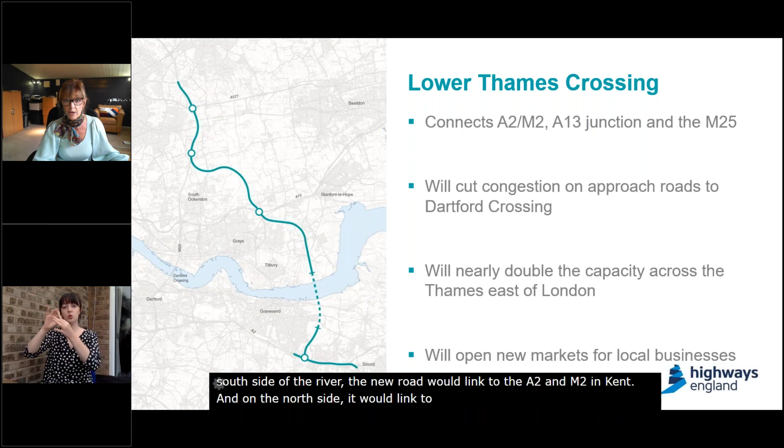So I'm now going to take this opportunity to provide a brief overview of the Lower Thames Crossing project. The Lower Thames Crossing is a proposed new road connecting Kent, Thurrock and Essex through two 2.6-mile tunnels beneath the River Thames. It would almost double road capacity across the river east of London, boosting local, regional and national economies, while offering new connections, better journeys and fewer delays. On the south side of the river, the new road would link to the A2 and M2 in Kent, and on the north side, it would link to the A13 in Thurrock and the M25 in Havering.

We're proposing a number of refinements to the design of the Lower Thames Crossing based on feedback received during previous consultations, and also on engagement with our stakeholders and ongoing design work. We now also have a much better understanding of some of the technical constraints, including new information about existing utilities. The proposed refinements include reduction to the overall size of the development boundary, minor changes to highways design, updated paths for pedestrians, cyclists and horse riders, fewer utilities diversions, more detailed landscaping proposals, and further developed ecological mitigation measures.

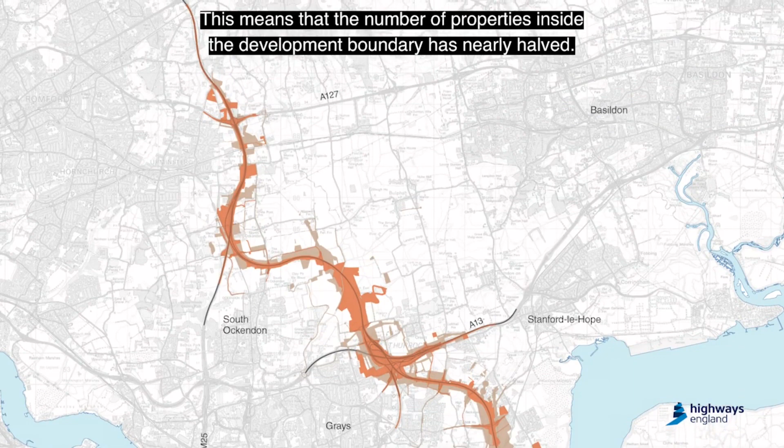Because we've refined the design of utility diversions in areas along the route, our overall development boundary, which is the land we need to construct the scheme, has reduced in size. This means that the number of properties inside the development boundary has nearly halved. You can see more details on this in our consultation documents online and in our virtual exhibition. If your property is in or near the development boundary, we will have written to you directly, but if you've got any questions, please do get in touch.

Around the northern tunnel entrance near Tilbury, we're proposing to install utilities that would provide a power supply to the tunnel boring machine and northern tunnel entrance during and following construction. A new water supply for the tunnel boring machine and construction site area would also be required. This supply would come from the Linford borehole and a local water main.

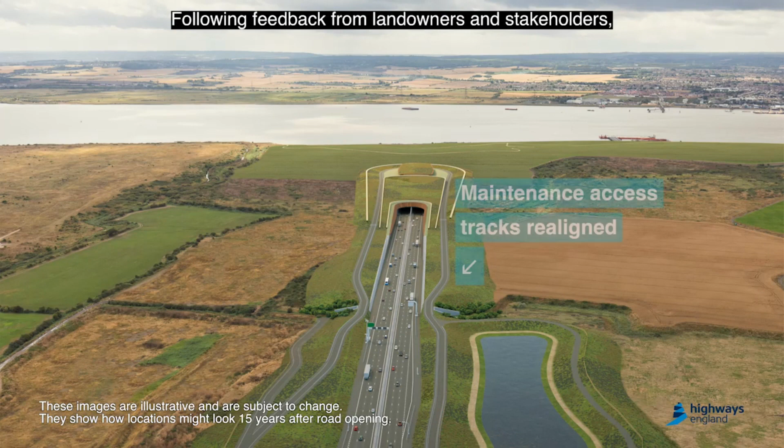We're also proposing earthworks which would create a new landform design around the tunnel entrance and provide wide-ranging views overlooking the Thames estuary. Following feedback from landowners and stakeholders, the maintenance access tracks around the northern tunnel entrance would be moved closer to the Lower Thames crossing. This is to allow for a shorter culvert length, which would minimise the impact on the local ecology and allow wildlife to navigate through the culvert more easily.

Two footpaths in the area would also be slightly realigned, and a new shared path along the south of Muckingford Road would also be progressed. This would allow for better connectivity between Chadwell St Mary and East Tilbury.

Near the A13 junction in Orsett, we're now proposing a new area of land for the relocation of the Travellers site. This would be adjacent to its current location with access off Gammonfields Way. As part of our woodland planting proposals, we've identified two separate areas off Baker Street that we would look to make accessible to the public.

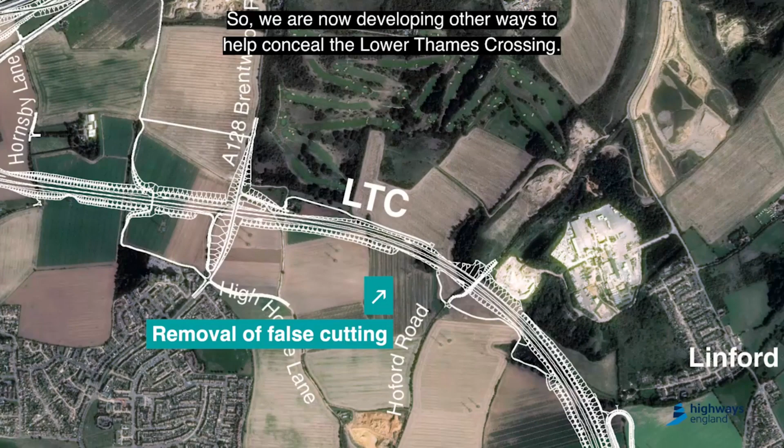Due to the essential realignment of a watercourse, we're proposing to remove a false cutting that we previously proposed in a section of the route between the A128 Brentwood Road and Hoford Road. So we're now developing other ways to help conceal the Lower Thames crossing. Further details on this can be found in our consultation maps and documents online.

As part of our utility proposals, we're planning a new permanent compound at Stanford Road, just to the east of Orsett Cock Roundabout. This would be required for the operation and maintenance of a proposed gas pipeline, which would supply the local community. In the vicinity of the Mardyke, we're proposing permanent access from Green Lane for the national grid. This is so it could maintain overhead electricity transmission cables during the diversion works and afterwards for the operation of the network.

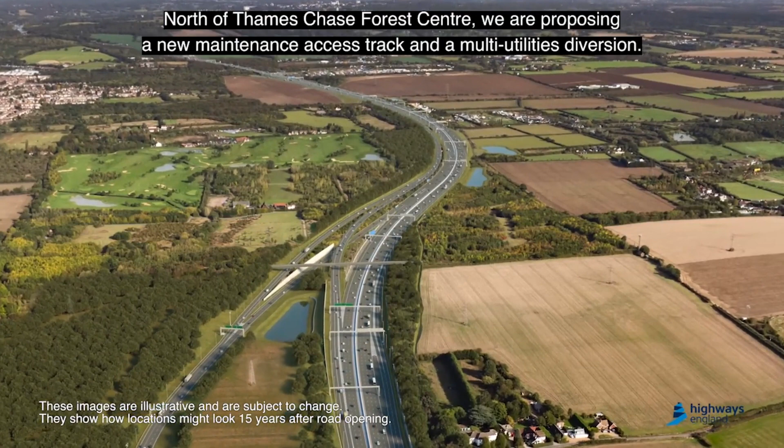North of Thames Chase Forest Centre, we're proposing a new maintenance access track and a multi-utilities diversion. We've located these within the same area to limit the reduction in woodland compensation that would be required to accommodate these changes. Around junction 29 of the M25 within the vicinity of the B186 North Road, some above and below ground multi-utilities would need to be diverted to facilitate the proposed route. Full details about these utilities proposals can be found in consultation maps and documents online.

We've been exploring solutions to maintain connectivity over the A127 and propose a new footbridge which would link the existing routes.

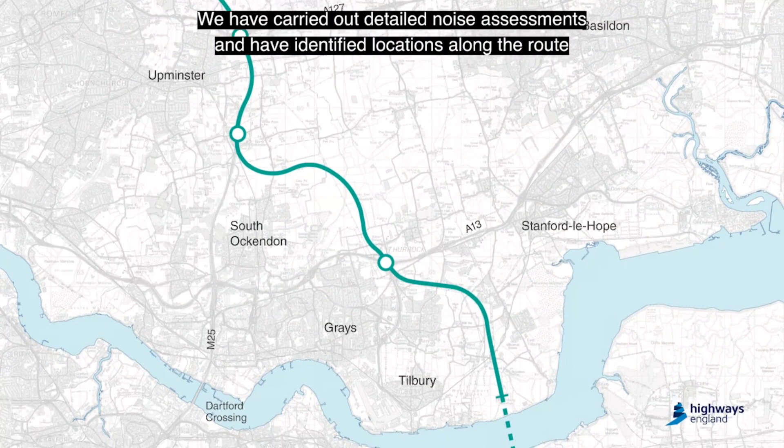We've carried out detailed noise assessments and identified locations along the route where noise barriers could be used to reduce the sound of traffic for local communities. Further details on these proposed locations can be found in our consultation documents and maps online, and in our virtual exhibition.

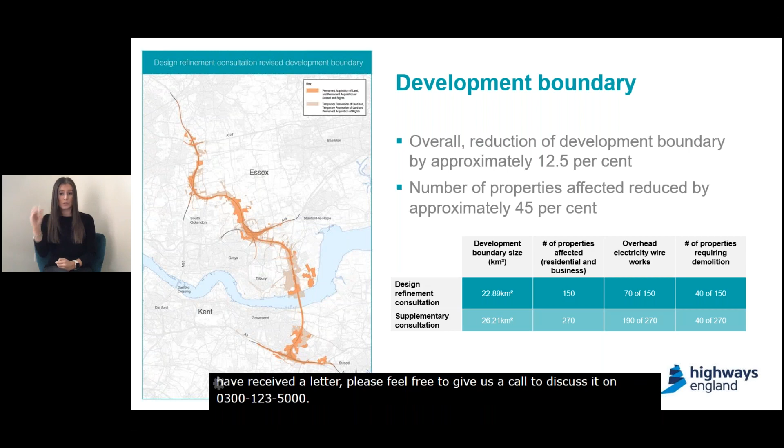If your property is affected by the scheme, you should have been written to already. If you have received a letter, please feel free to give us a call to discuss it on 0300 123 5000. That's 0300 123 5000.

Okay, so on to environmental impacts now. Firstly, ancient woodlands. Following feedback from our supplementary consultation, we've been able to refine the land required for utility diversions shown at supplementary consultation. In doing so, we've been able to reduce the impacts to various wooded areas.

Regarding green bridges, we've improved our landscaping proposals, resulting in better opportunity for ecological connectivity. This means we will now have consolidated green space on the bridges, featuring vegetation like hedgerows, shrubs, trees, and grassland. This will make it more attractive for wildlife to use as a crossing point over any given road. And finally, noise barriers.

To help mitigate noise, we've introduced noise barriers in areas where higher noise levels and disturbance is anticipated. These barriers vary in length and height along the route. To learn more about a specific noise barrier, please refer to the Guide to Design Refinement consultation.

Now on to landscaping. As we've progressed the design of the Lower Thames Crossing, we've also developed more detailed landscaping proposals to mitigate visual impacts of the project's above ground infrastructure.

Since supplementary consultation, we've added more detail on the specific type of ecological mitigation proposed across the route, such as more grassland, woodland, and further refinements around watercourses. We've also provided an update on new landforms and new viewpoints.

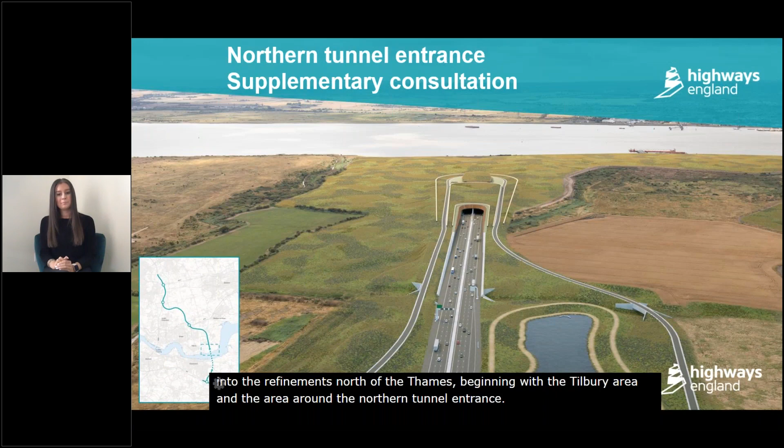So on the screen right now, I can't see it myself, but I hope you can. There should be an image showing the Northern Tunnel entrance near Tilbury as we presented it at the supplementary consultation. Next we'll switch between this and an image showing our proposals for this design refinement consultation so that hopefully you can see the difference.

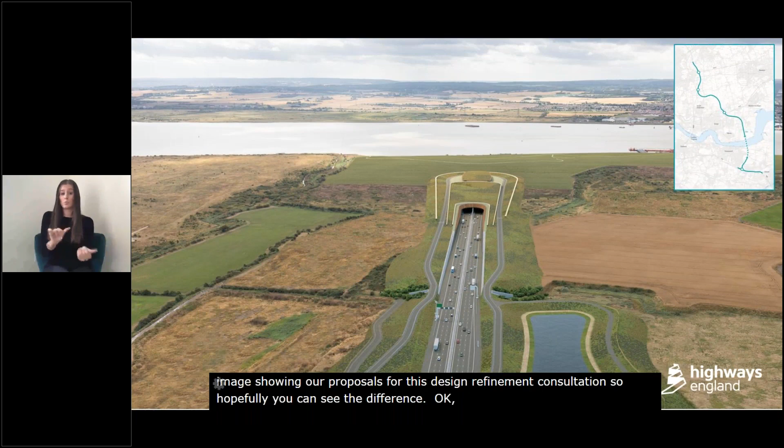Okay, so turning to the differences in this area, firstly landscaping. As indicated by point 1 on the image on screen, a new landform with footpaths will lead up to elevated viewpoints looking out to the south, east and west, from where Coalhouse and Tilbury forts will be visible. The landform design will be created using excavated material from the tunnel, and the surrounding area will be restored for agricultural purposes, which is in keeping with the existing land use.

With regards to utility proposals in this area, to supply temporary utilities to the construction site and permanent supply to the Northern Tunnel entrance, some works will be required that sit approximately 1.5 kilometres outside of the development boundary shown at supplementary consultation.

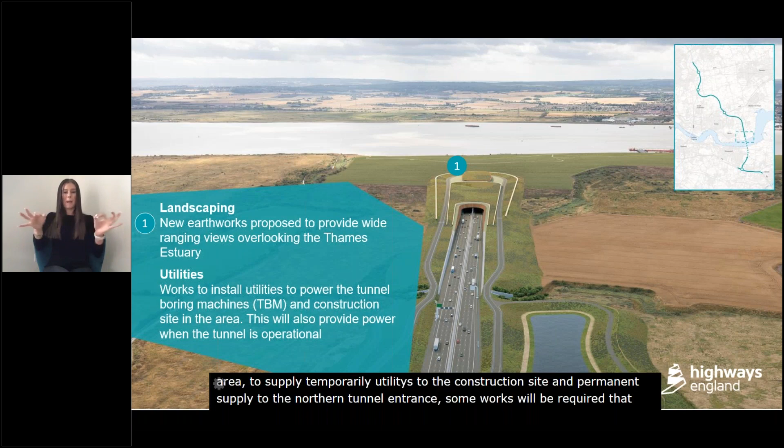Staying in this area, now looking at the Tilbury North Tunnel portal from another angle, as we presented it at supplementary consultation, and we'll again switch between this image and one showing our proposals for the design refinement consultation so that you can see the difference.

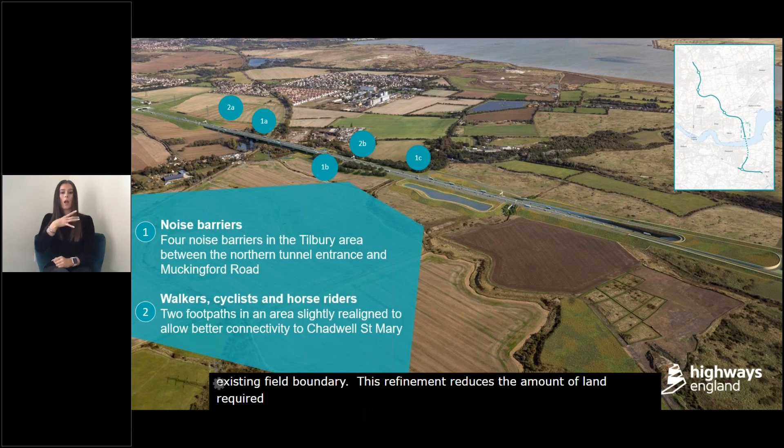For walkers, cyclists and horse riders, paths are shown as numbers 2A and 2B on the image. The path closest to us is footpath 200. The path furthest towards East Tilbury is footpath 61. Footpath 61 has been slightly amended to use more of the existing footpath and to follow the existing field boundary. This refinement reduces the amount of land that will be required permanently in this area. Footpath 200 will be diverted around the edge of the field rather than pass through it, as was proposed at supplementary consultation. This would connect with the existing footpath at either end, and this proposal is closer to the original alignment.

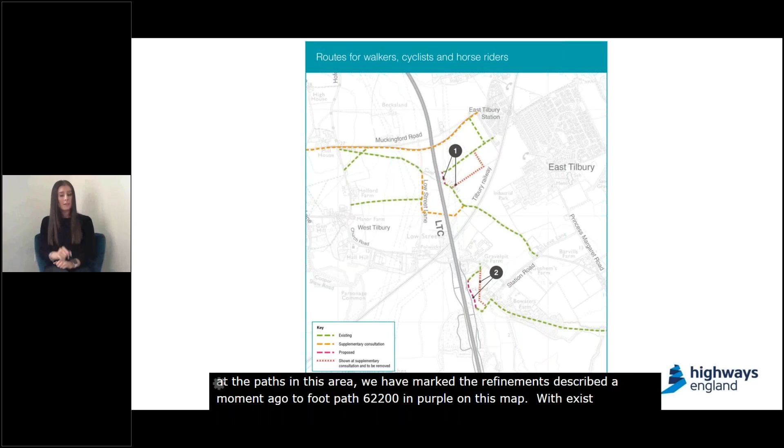Taking a closer look at the paths in this area, we've marked the refinements described a moment ago to footpaths 61 and 200 in purple on this map, with existing paths in green, and what was shown at supplementary consultation in orange. You can also see where we've made refinements indicated by the dotted X's. These refinements reduce the amount of land that will be required permanently in this area.

Okay, moving on to utilities in the Tilbury area. As the tunnel boring machine would need a water supply to assist with the excavation process, we're proposing 2 routes to gain access to water using the Linford borehole, as well as a local water main located near Fort Road and Gun Hill. Details of where we propose to route the water mains can be found in the Guide to Design Refinement Consultation.

In addition to the works described previously, we're also planning on the addition of 2 substations in the areas surrounding the northern tunnel entrance. These again are described in more detail in our Guide to Design Refinement Consultation.

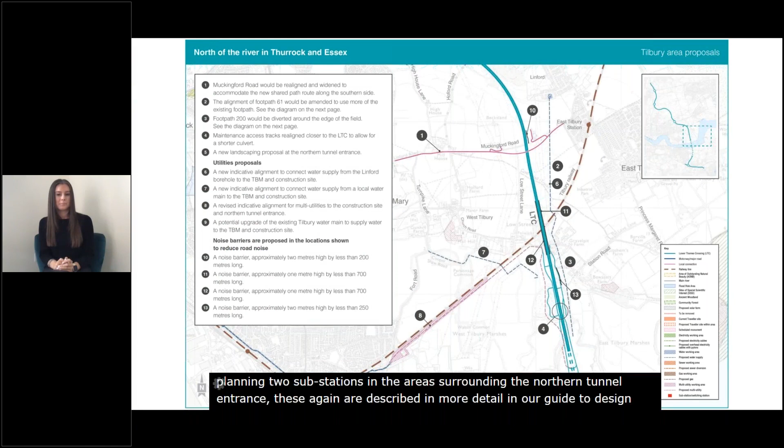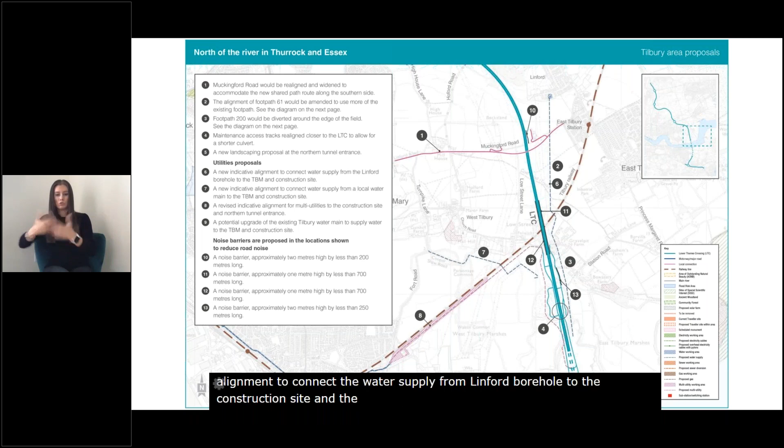So just to recap on those refinements, hopefully you'll see on screen a map which is also shown on pages 44 to 45 of the Design Refinement Consultation Guide, so you can cross-reference. Starting with number 5 on this map, you'll see where we propose the lookout over the Thames estuary. Moving on to utility diversions, points 6 through to 9 show some of the utility diversions that we're proposing. Point 6 in particular shows the new alignment to connect the water supply from Linford borehole to the construction site and the tunnel boring machine. And finally, points 10 through to 13 show the proposed location of noise barriers in this area.

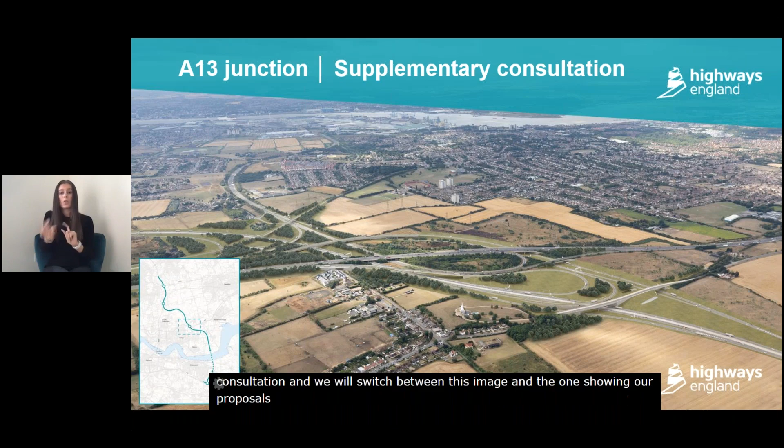Okay, so to go through those differences in a bit more detail, firstly, with regards to the travellers site in this area, following further design work and feedback from our supplementary consultation, we're now proposing a new site adjacent to the current location with access off Gammonfields Way. The travellers site would remain approximately 1.5 hectares in area, the same as it is now, with an additional 1.5 hectares set aside for appropriate access and landscaping. This is shown as number 1 on the image on screen.

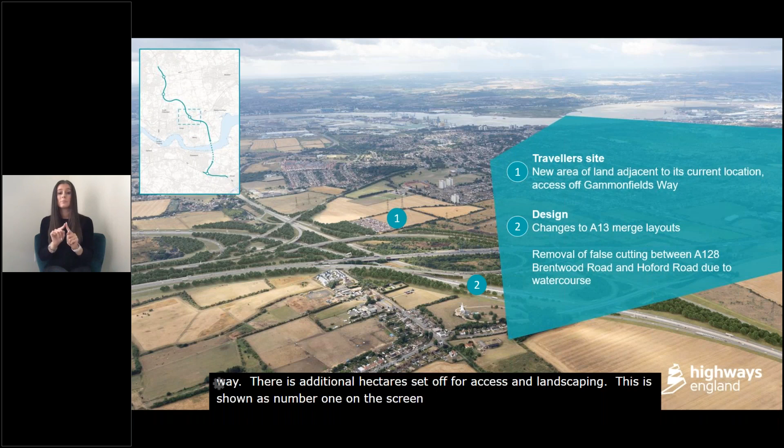Moving to design refinements at the A13 junction, we proposed some changes to the merge layouts, shown by number 2 on the image on screen. Where the A13 westbound and A1089 northbound slip joins the Lower Thames Crossing northbound carriageway, our modelling has shown that more heavy goods vehicles would join Lower Thames Crossing northbound from the A1089, so a different type of merge layout would be required. Also, where the slip road from the Orsett-Cock roundabout joins the existing A13 westbound, there's a slight increase in forecast traffic flows, meaning we're proposing a different merge layout in this location as well.

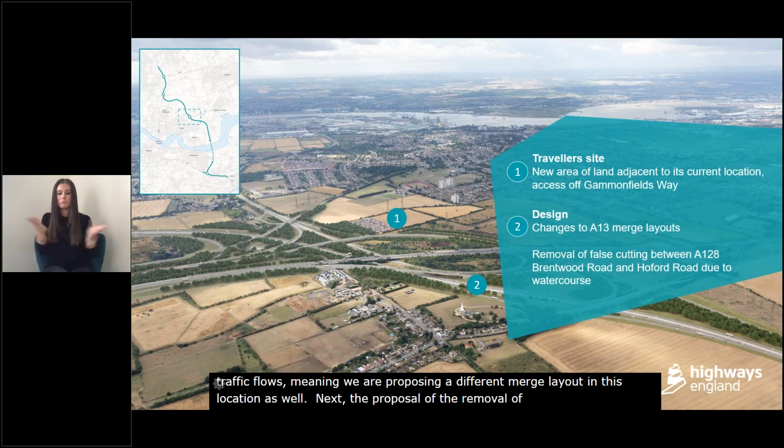Next, we're proposing the removal of a false cutting or sloped embankment between the A128 Brentwood Road and Hoford Road. This is because it was at the same location as a watercourse. The two were coincident, which required realigning to avoid Lower Thames Crossing. Removing this sloped embankment would mean losing visual and noise screening, so some additional fencing and planting are proposed to help conceal Lower Thames Crossing.

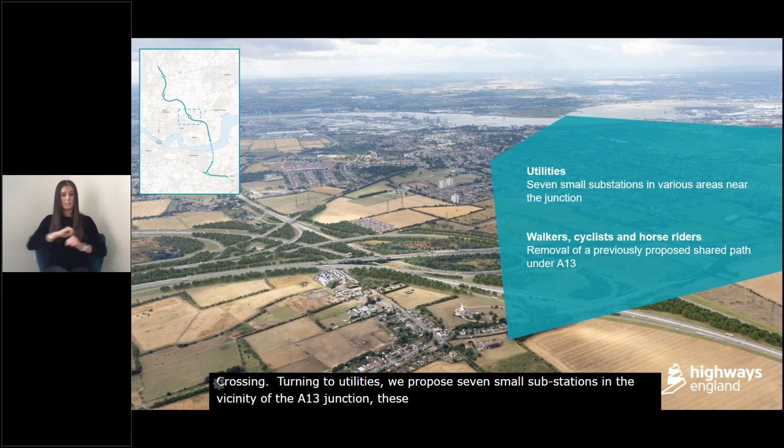Turning to utilities, we currently propose 7 small substations in the vicinity of the A13 junction. These would be approximately 3 meters by 3 meters in size, with a total area of 5 meters by 4 meters. If you'd like to know the specific locations of these substations, you can find more details in the Guide to Design Refinement consultation.

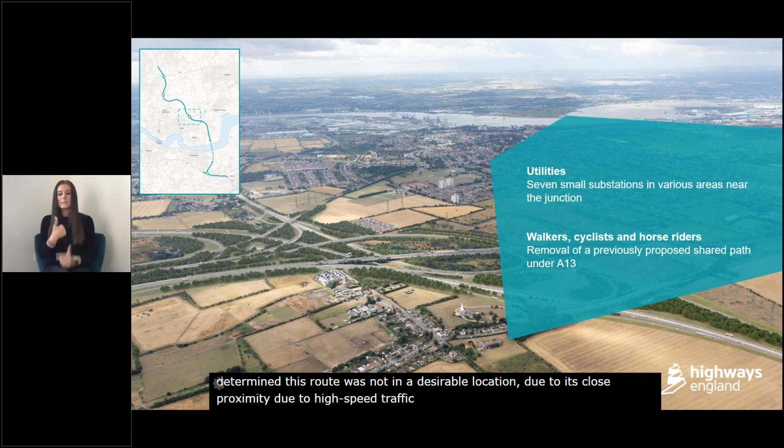Turning to walkers, cyclists and horse riders, at supplementary consultation we were exploring the feasibility of a new footpath connection under the A13. But following further investigation, it was determined that this route was not in a desirable location due to its close proximity to high-speed traffic. As a result, the open space to the north of the A13 that was proposed at supplementary consultation is no longer included in our plans, as it would not be accessible.

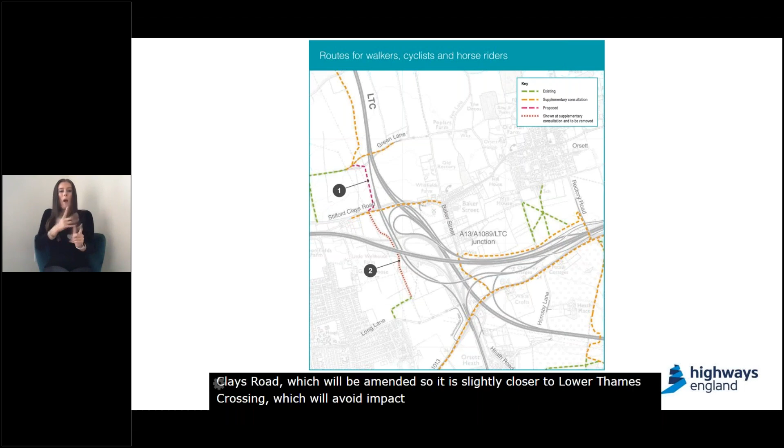Taking a closer look at paths in this area, we've marked the newest proposed refinements in purple, with existing paths in green and what was shown at supplementary consultation in orange. You can also see where we've made refinements shown by the dotted X's. Number 1 on this map shows the shared path proposed at supplementary consultation between Green Lane and Stifford Clays Road, which will be amended so it's slightly closer to Lower Thames Crossing, avoiding impact on some farmland. Number 2 shows what was discussed previously, where we're no longer proposing a shared path under the A13 due to its close proximity to the A13 slip roads.

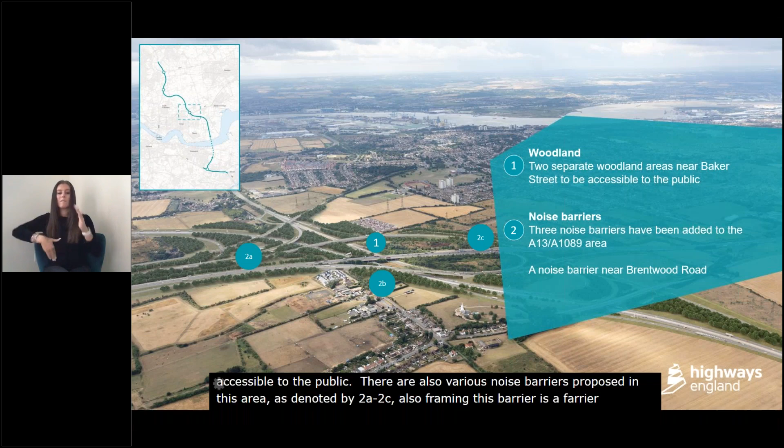Moving on to woodlands, shown as number 1 on this image, as part of our planting proposals at the A13 junction, we have identified 2 separate woodland areas off Baker Street that we would look to make accessible to the public. There are also various noise barriers proposed in this area, denoted by numbers 2A through to 2C on the image on screen, and also out of frame is a noise barrier located at Brentwood Road. Details of all the noise barriers are available in the Guide to Design Refinement consultation, available on our exhibition website.

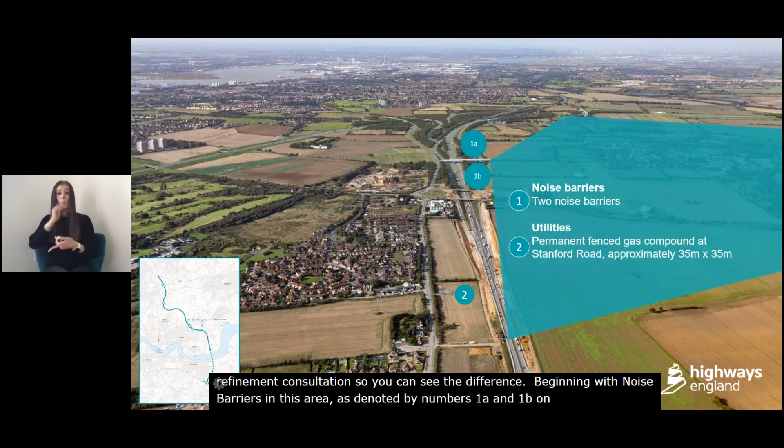Beginning with noise barriers in this area, denoted by numbers 1A and 1B on this image, there are 2 noise barriers proposed west of the Orsett Cock Junction. With regards to utilities, denoted by number 2 on the image, a permanent compound east of Orsett Cock roundabout along Stanford Road is planned for the operation and maintenance of a proposed gas pipeline in this area. The facility, including equipment, would be located within an area approximately 35 meters by 35 meters and would include fencing for security reasons.

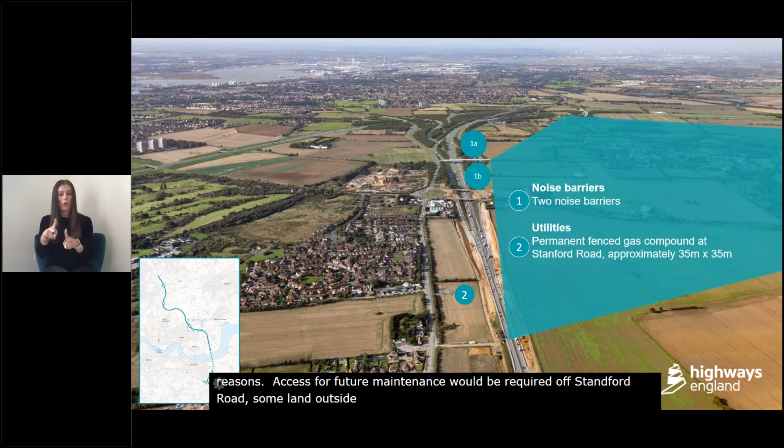Access for future maintenance would also be required off Stanford Road, and some land outside of the development boundary we presented at supplementary consultation would also be required for these works. This means the development boundary has been extended in this area.

Just to recap on the refinements we've just covered, this map is also shown on pages 56 to 57 and 58 to 59 of the Guide to Design Refinement consultation.

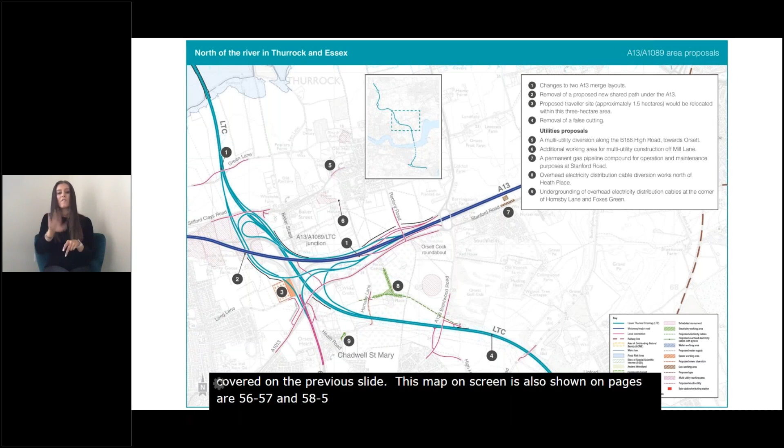Starting with number 1, this is where we propose changes to the merge layouts owing to improved modelling data. Number 2 shows where we're no longer progressing with a shared path under the A13. Number 3 shows where we have proposed the relocation of the traveller site adjacent to its current location. And number 4 shows where we propose the removal of the false cutting or sloped embankment.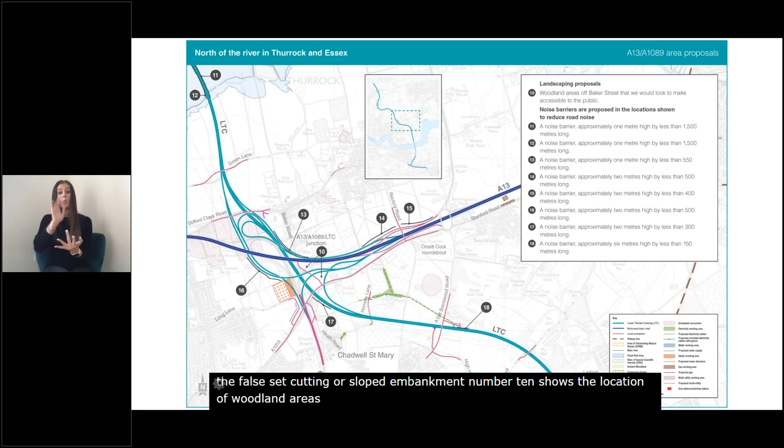Number 10 shows the location of woodland areas off Baker Street that we're proposing to make accessible to the public. And finally, numbers 11 through to 18 show the location of noise barriers.

Now we'll cover the refinements in the Mardyke and M25 Lower Thames Crossing junction areas. On screen is one of the viaducts and embankments in the area of the Mardyke River, north of the A13 junction, as presented at supplementary consultation.

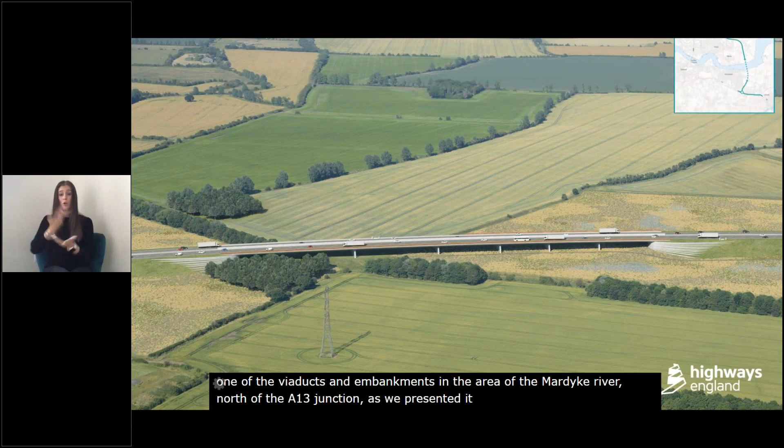For utilities, National Grid will need access in this area to Green Lane for the maintenance of their overhead power lines. This access will be required during the diversion works for the lines and afterwards for the operation of the network. These works will require the use of some land which is outside of the development boundary that we presented at supplementary consultation. By increasing the land for the works required in this location, we have more space, and this means we can avoid impacting some existing vegetation.

On screen now is the Lower Thames Crossing M25 junction as seen from two different perspectives that we presented at supplementary consultation. Beginning with the image on the left, we're looking at Lower Thames Crossing from the east of North Road Bridge and the area around the wilderness. On the right, the view is showing Lower Thames Crossing joining the M25 northbound with Thames Chase in the foreground. As before, we'll switch between these images and the ones showing our proposals for this design refinement consultation so you can see the difference.

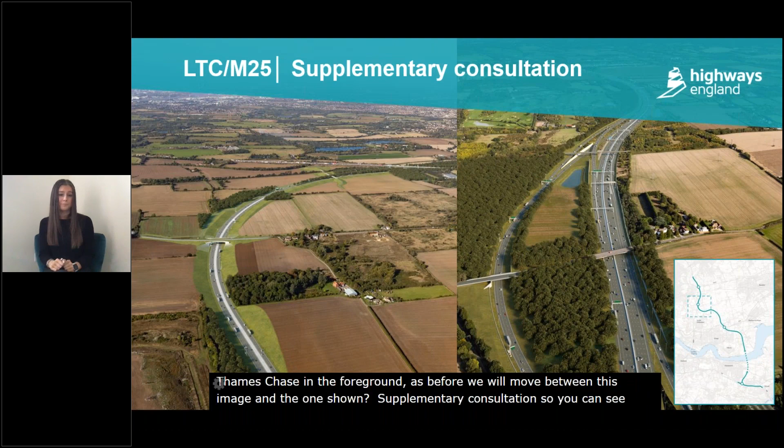Moving on to noise barriers in this area, we're proposing a noise barrier in the area of the wilderness, denoted by number 1 on the image on screen. Details of these noise barriers are available in the Guide to Design Refinement Consultation, as mentioned before.

Also, with regards to woodland planting in this area, we're proposing to divert a watercourse within the area of the wilderness. To accommodate this, we're proposing a reduction in woodland planting in this area, shown as number 2 on the screen.

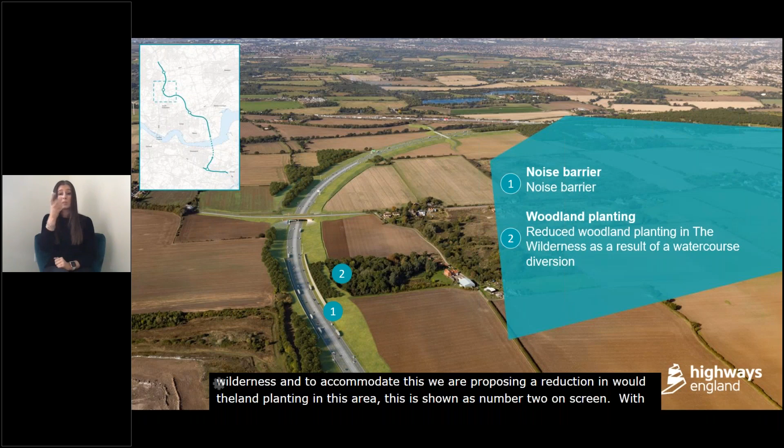And with regards to utilities in this area, we're currently proposing one small substation, details of which are in the Guide to Design Refinement Consultation.

Moving to Thames Chase Forest Centre, shown as number 1 on this image, within the area of the Thames Chase Forest, we're proposing a new maintenance access track, which will be shared with a multi-utility diversion corridor north of Thames Chase Forest Centre. These are located in the same area to minimise the reduction in woodland compensation.

Shown as number 2 on this image, we also propose to acquire replacement land to the north and south of Thames Chase Forest Centre. This would be landscaped to match the current site and would connect to existing paths. The replacement land would be designed to complement the existing forest.

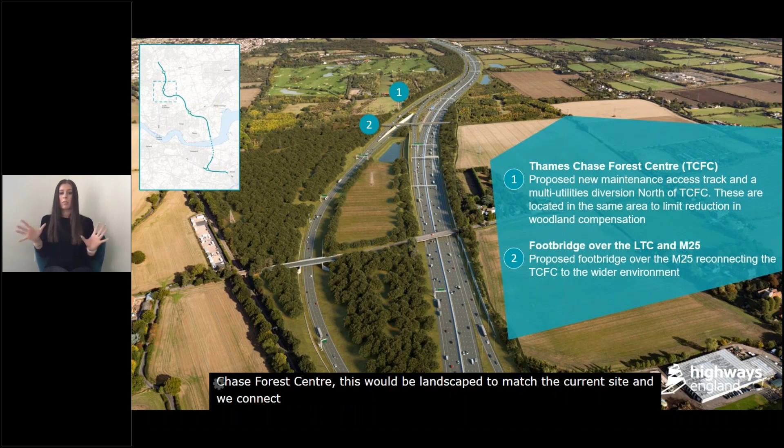As part of the mitigation, we propose a footbridge over the Lower Thames Crossing and the M25 to improve connection between the western and eastern sections of the Thames Chase Community Forest.

With regards to utilities, a sewer diversion may be required from Ockendon Road to St Mary's Lane via the B186. This is due to the proximity of the existing sewer pipes to the proposed Lower Thames Crossing route and the proposed Ockendon Road bridge construction works, shown as number 1 on the image.

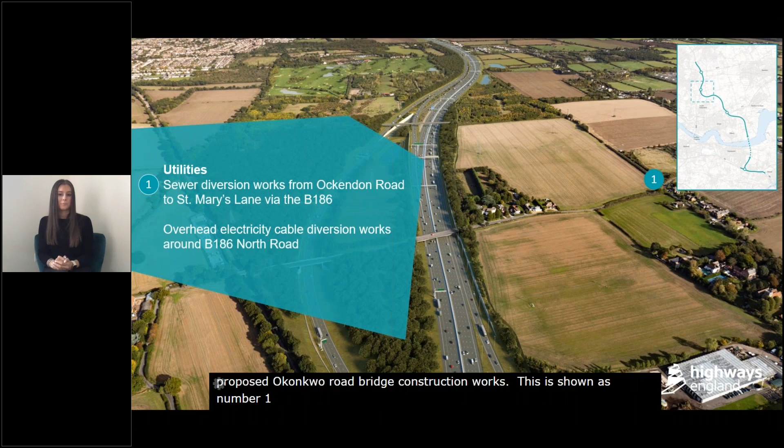Some above and below ground utilities within the vicinity of the B186 North Road will also need to be diverted to facilitate the proposed Lower Thames Crossing route. Some of the overhead power lines in this area may also need to be placed underground to avoid Lower Thames Crossing.

So let's recap on those refinements. This map on screen is also shown on pages 70 to 71 and 72 to 73 of the Guide to Design Refinement Consultation. Starting with number 6 on the map, this shows the location of sewer diversion works. Number 8 shows where utility works would take place in the vicinity of the B186 North Road.

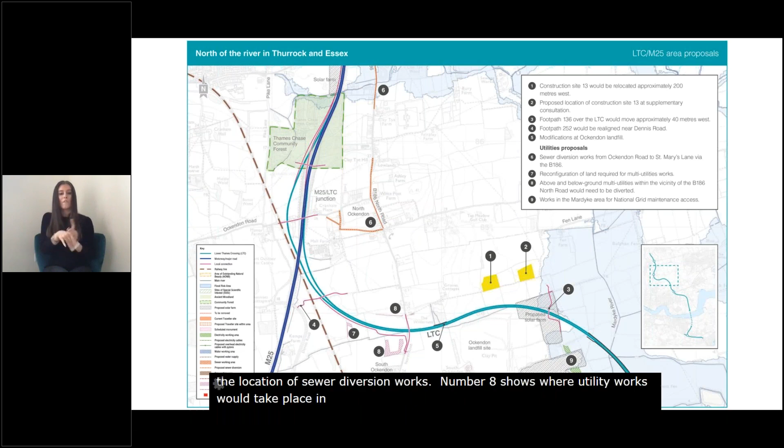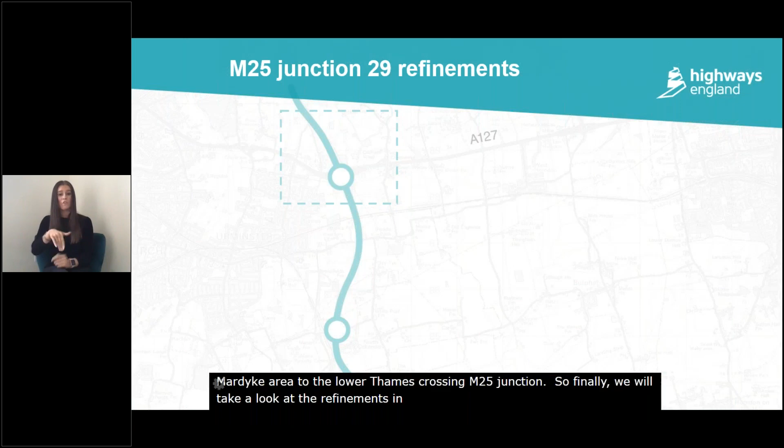So finally, we'll take a look at the refinements in and around junction 29 of the M25. On the screen right now is junction 29 of the M25 as we presented it at supplementary consultation. At supplementary consultation, we showed an existing path next to the south side of the A127 that was impacted due to the addition of the segregated left turn lanes on and off the Lower Thames Crossing. These lanes meant that the existing crossing points to the south of the junction would no longer be feasible.

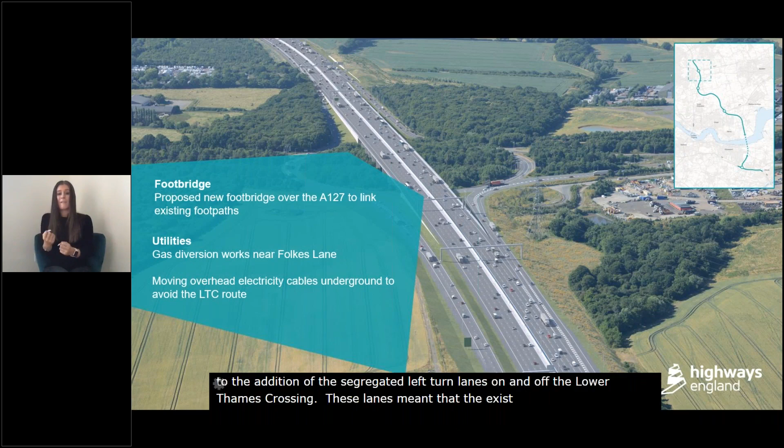So we now propose a footbridge over the A127 to link existing routes. Unfortunately, it's just off the image on screen, but I'll point it out on the next slide. As shown on screen now, denoted by number 1 on the map, this indicates where we propose a new footbridge over the A127. And the other adjustments to our proposals are shown in purple colour.

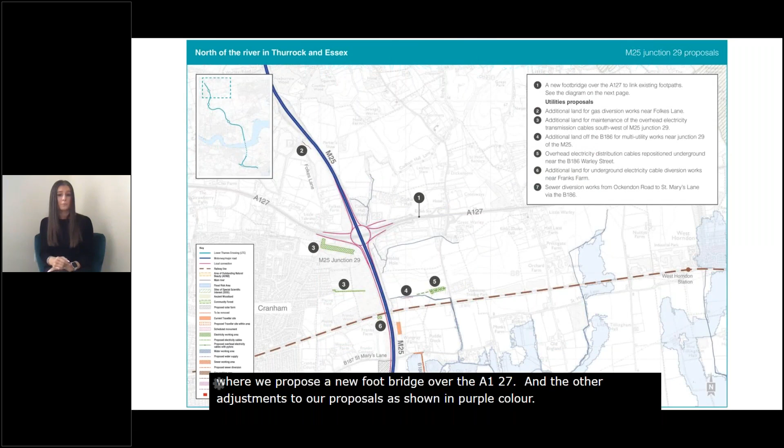So to finally recap on these refinements that we've just covered on the previous slides, the map on screen is also on pages 82 to 83 of your guide. Starting with number 1, this shows the proposed footbridge over the A127, which will link existing facilities. Moving on to number 2, this is where the Folkes Lane gas diversion would take place, for which we require some additional land compared to what was presented at supplementary consultation. And finally, number 5 on the map shows where we're proposing to bury electricity distribution cables near the B186 Warley Street. That wraps up the details of the refinements.

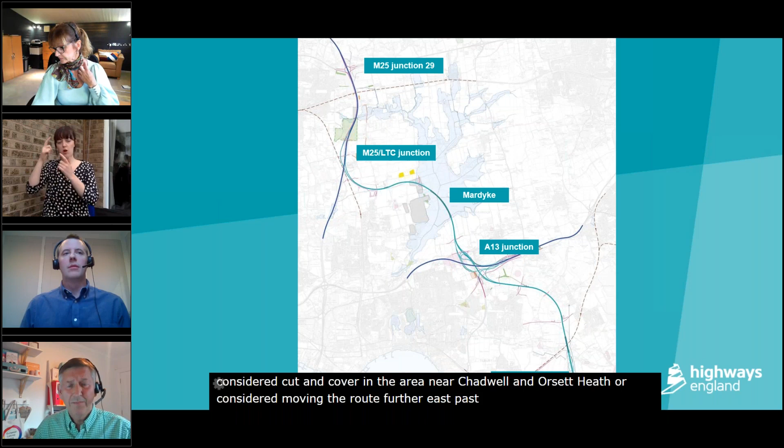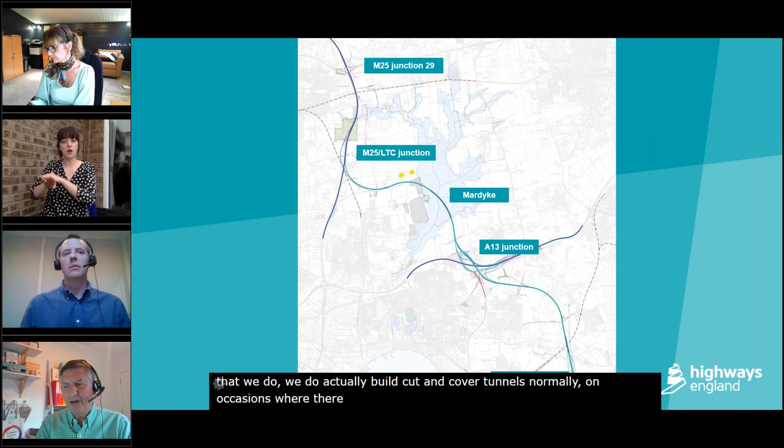Yeah, sure. We have actually made a presentation to Thurrock Task Force on this query. We recognise that cut and cover tunnel routes have a purpose, and sections of cut and cover have been included at the tunnel portals and within the junctions as necessary. We actually build cut and cover tunnels normally at locations where there's development above or near the alignment that might have a significant change in the topography, or proximity to buildings, utilities, or something like that - we usually put those where we are close to infrastructure.

But since the preferred route announcement, we have reduced the alignment north of the river considerably, and we've also put in false cutting, which is bunding at either side. Steve mentioned it earlier in the presentation. So we've tried to disguise the route by putting these false cuttings in, which are mounds either side of the actual scheme.

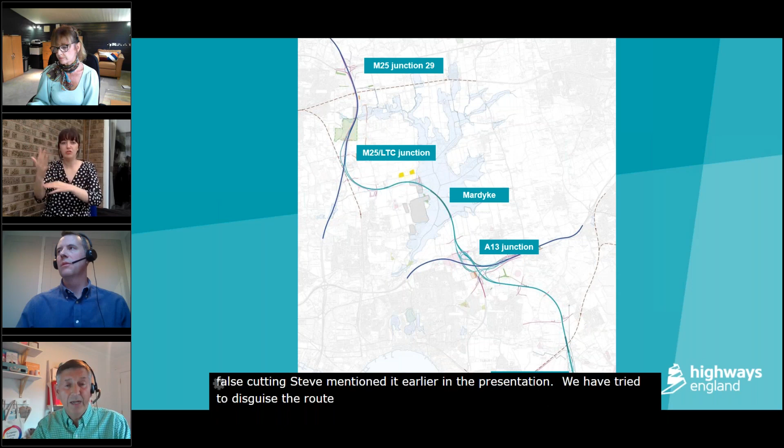Just to explain what a cut and cover tunnel is - it's essentially a concrete trough where the road sits in the bottom of the trough, and you put a lid over the top, so it actually buries the scheme. With doing that, there's a lot of technical constraints. It makes a much wider footprint for the scheme, it takes a lot longer to build, it would increase the carbon footprint, and it would limit any possible future connectivity.

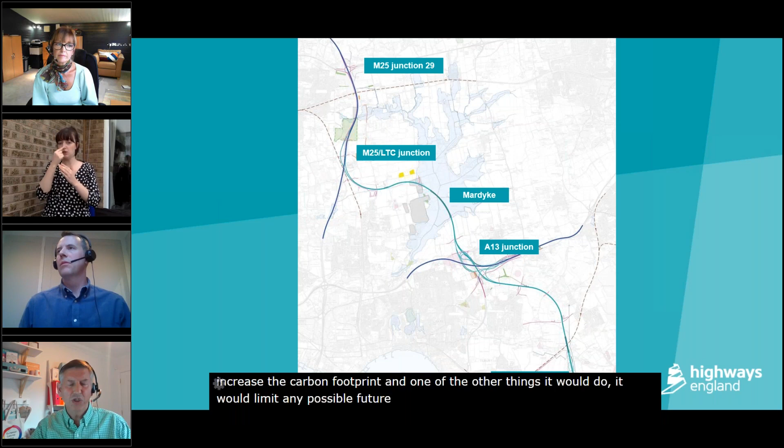So if there was a junction required at a later date, you would not be able to connect to the actual road. Also, if you're going through somewhere like the Mardyke, it would create environmental issues as you were building it. And finally, it would be up to 12 times more expensive. So with that, we've taken a view on what we've built and designed, and we think it's the right solution at this location, and it will be thoroughly tested when we go to DCO.

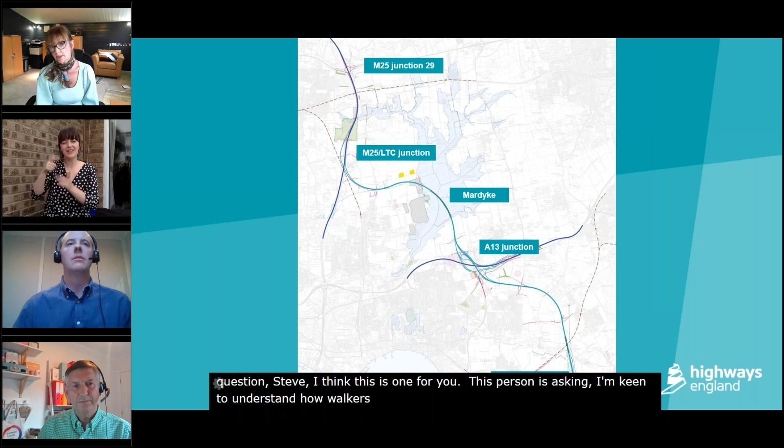Thanks, Gary, for that comprehensive response. The next question, Steve, I think this is one for you. This person is asking: I'm keen to understand how walkers and cyclists will travel along the A127 traversing the M25 roundabout, given the new slip road that's proposed. Steve, can you answer that?

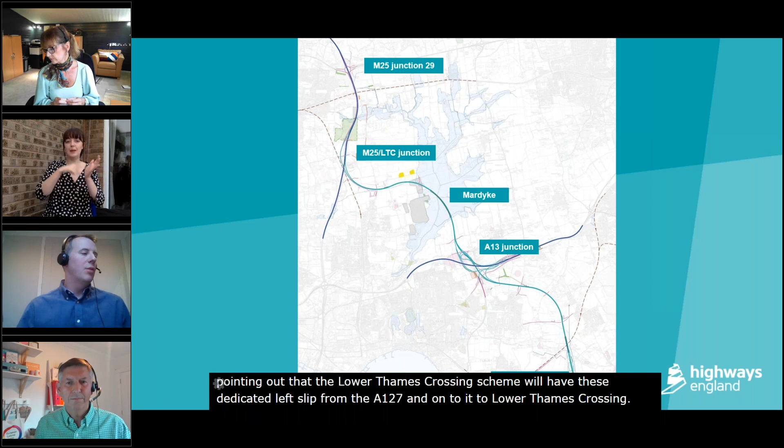Yeah, sure. That's one of the changes we've made in this consultation. Whoever's asked the question is quite right in pointing out that the Lower Thames Crossing scheme will have these dedicated slip roads from the A127 and onto the A127 to Lower Thames Crossing, and in doing so, that will sever the existing connections which are there right now.

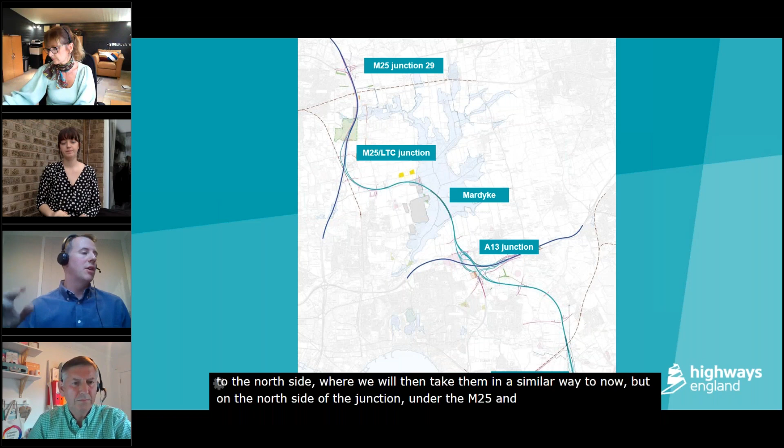So it is possible - there's a footway alongside the A127, it's possible to walk along there on the south side through the junction under the M25. What we propose to do as part of this design refinement consultation is to create a new crossing via a bridge over the A127. That will allow non-motorised users, walkers, cyclists, to cross from the south side of the A127 to the north side, where we will then take them in a similar way to now, but on the north side of the junction under the M25. The junction is also going to be signalised as part of our proposals, so the signals will allow pedestrians and cyclists to cross at the junction safely.

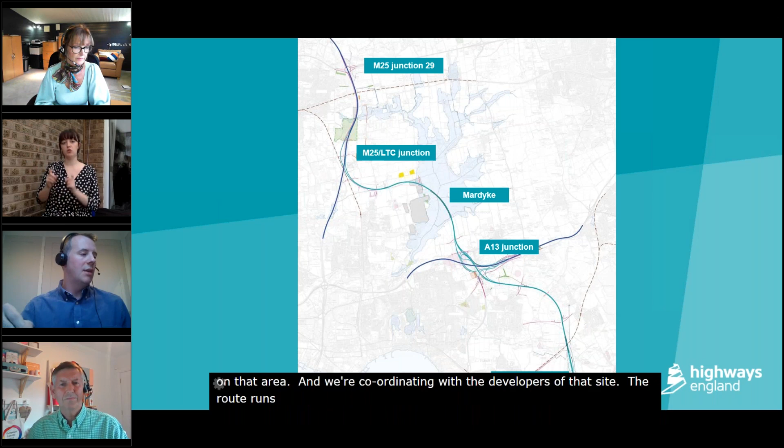So it should provide a good route east-west along the A127. We're also promoting a secondary route, which hugs the boundary of the southeastern side of the junction - it goes west along the A127 and then turns south through the development site in that area, and we're coordinating with the developers of that site. The route runs south alongside the M25 and then under the M25 close to the Shoeburyness Railway, and then connects into the Cranham playing fields. So there's a secondary route there that we're also promoting as part of the wider connectivity.

I hope that answers that particular question. And if you've got anything you want to feed back on those changes, then do make sure that you submit a response to the consultation.

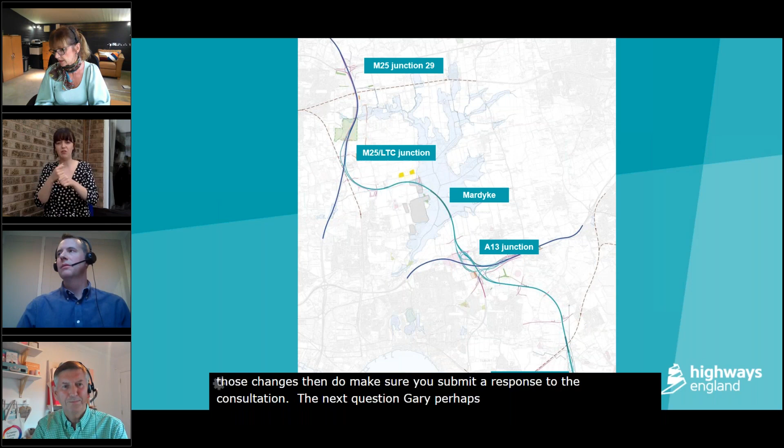The next question, Gary, perhaps you can pick this up. This is about motorcycles, asking us to confirm that motorcycles will be toll-free in line with the statement that charging will be the same as the Dartford crossing. Supplementary to that, do motorway traffic rules apply, and are learners with L plates riding powered two-wheelers, i.e. motorcycles, allowed? Quite a lot in that question.

I think the level of charging and the charging regime would replicate the same approach applied at the Dartford crossing. So yes, motorcycles would be free.

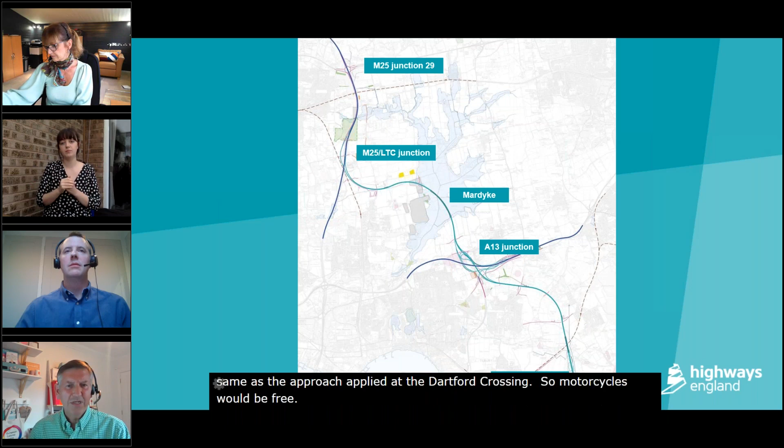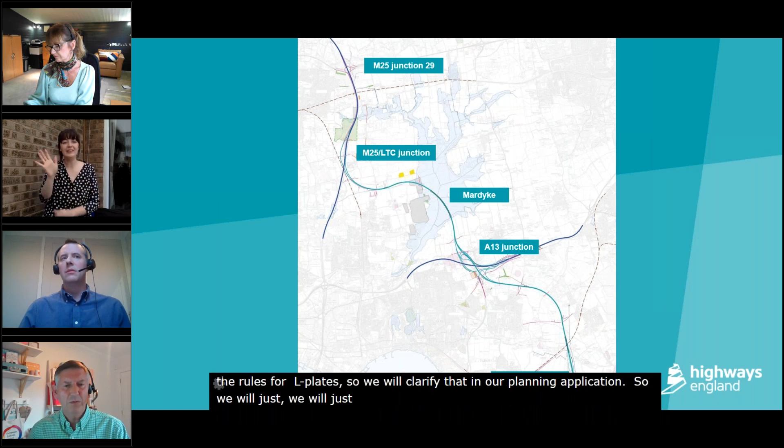But as far as the motorway traffic rules, we're still trying to find out more on that, and also the rules for L plates. So we will clarify that in our planning application. We're just reviewing actually what our proposals are, so we will clarify that when we go to our planning application.

Thanks very much, Gary. We've had a question come in about the questions we're covering this evening and that are coming in during the consultation period, asking us, are all the questions given during the consultation period or on the webinar sessions visible to the general public? And will the answers be available as part of the online consultation document, notwithstanding the GDPR sensitivities of specific homeowners' questions?

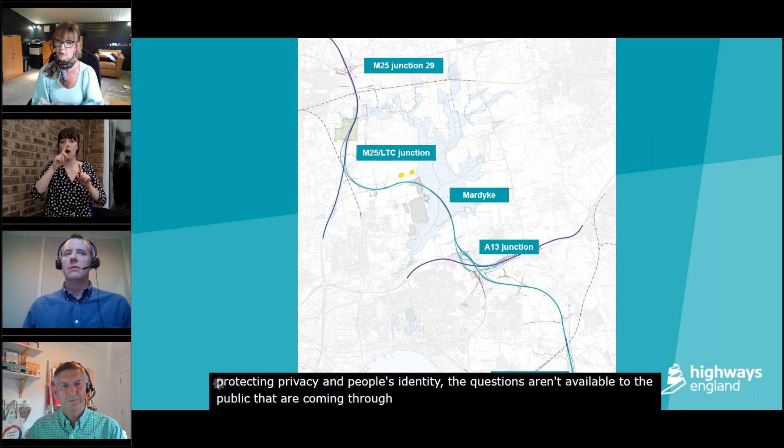I think I can probably answer that. For reasons of protecting privacy and people's identity, the questions aren't available to the public that are coming through on the webinar this evening. Not everybody wants their questions shared in a public forum, so we've respected that.

But it is important to recognise that the reason why we're holding this webinar this evening is so that we can better inform people so they can provide official responses to the consultation, and it's those responses which will be formally captured in the consultation report, which of course forms part of our development consent order, which will be submitted later on this year.

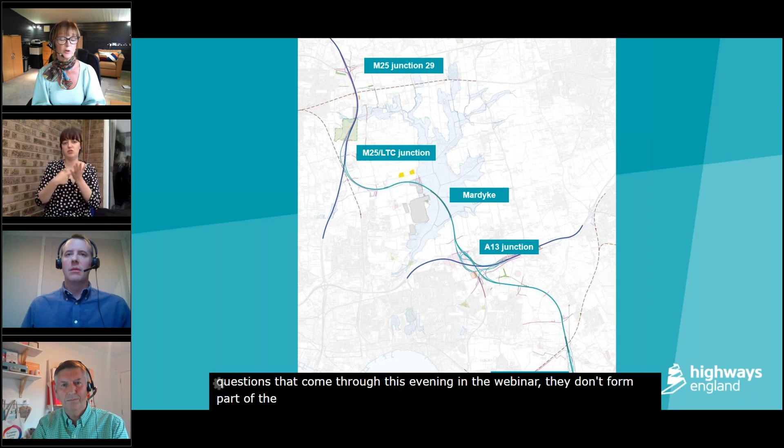So the questions that come through this evening in the webinar don't form part of the official consultation report, but of course responses which may have been informed by any questions people ask on any of the platforms available throughout the consultation period or in the webinar definitely will feed through into the consultation report. So I hope that helps on that. Let me just have a quick look, I've slightly lost my place while I was answering that, but I can see what the next question is now.

This is a question about horse riding. Steve, quite a straightforward question here: what are your horse riding plans? I take it that means plans for people who want to go horse riding near the scheme.

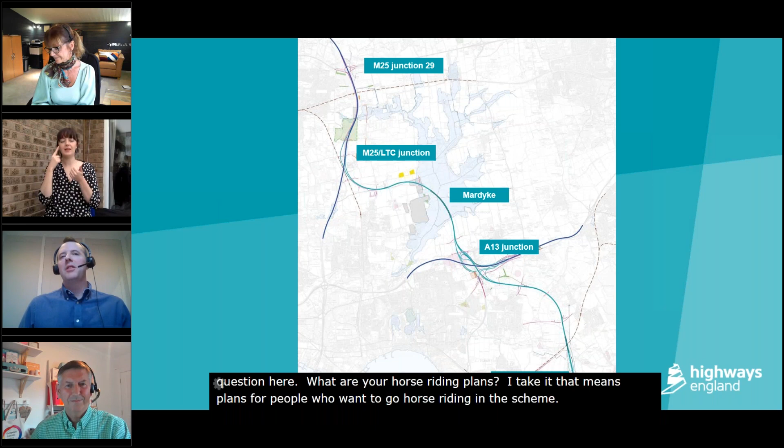Sure, okay. So I think in total there's just under 50 kilometres of footpaths and bridleways proposed as part of Lower Thames Crossing. That's reconnecting existing routes plus some additional ones. I think the split between north and south is slightly more in the north, about 28 kilometres, something like that in the north, with the remainder in the south of the river.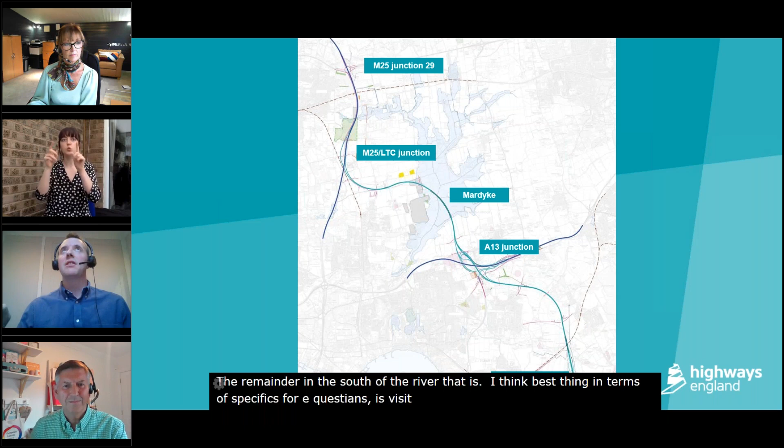I think the best thing in terms of specifics for equestrians is to visit the consultation website, where there's an interactive map which will show you where all the routes are. I think it's fair to say it doesn't go into the detail of defining every single bridleway or footpath, and that's partly because we're still working through that detail at the moment.

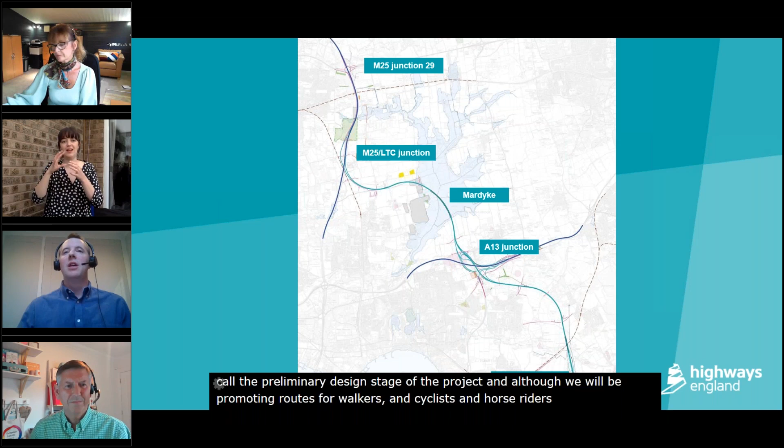We're at what they call the preliminary design stage of the project, and although we'll be promoting routes for walkers, cyclists and horse riders within our development consent order, the detail of those routes will come at a later date as the scheme progresses. But please have a look on the website where there's an excellent interactive map, and hopefully you'll be able to see the routes in your particular area.

Thanks, Steve. Gary, we've had a couple of questions about the route come in which are fairly similar, asking us to explain why the route has been moved 60 metres closer to Linford, and why the Lower Thames Crossing is so close to Linford when it could have been moved west.

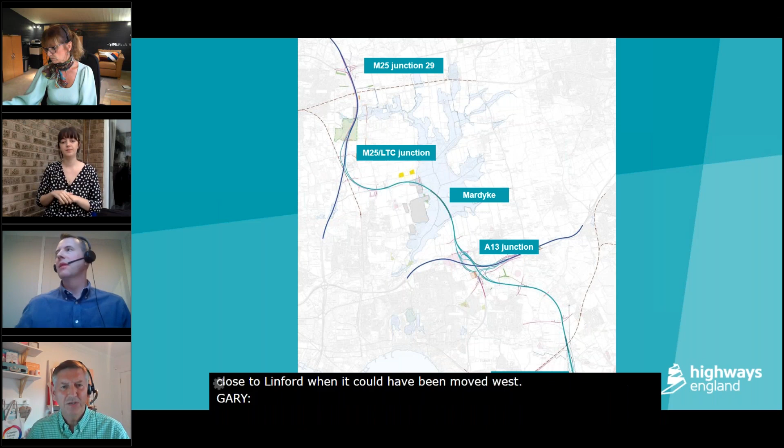There hasn't been a change in the alignment in this round of the consultation. We haven't changed the alignment through this section. We did consult on this during the supplementary consultation when we moved the route about 60 metres further north to east, and it did move closer to Linford. The move was to avoid having to move some overhead cables and pylons.

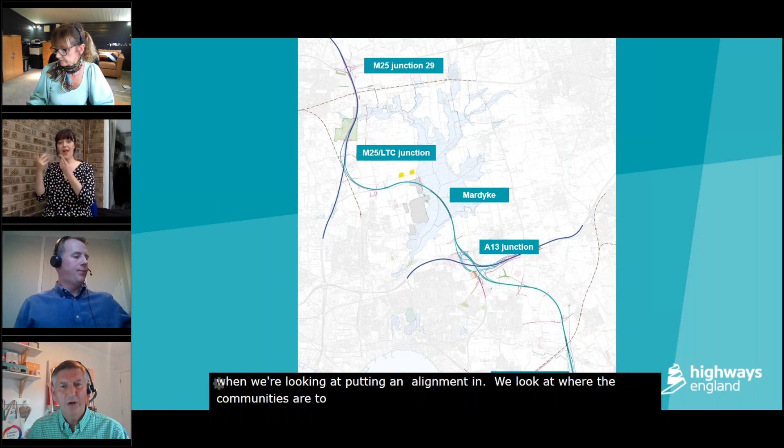We looked at avoiding communities where we can mitigate noise and air quality. That's one of the key constraints when we're looking at putting an alignment in. We look at where the communities are to keep the alignment away from communities as much as possible, and we take a balanced approach to our design, looking at all the constraints. Where we found an alignment that sits between the communities, the utilities, and natural features like watercourses, we try to make sure that it does fit into this location. We will be using false cuttings to reduce the visual and noise impact of the alignment in that location.

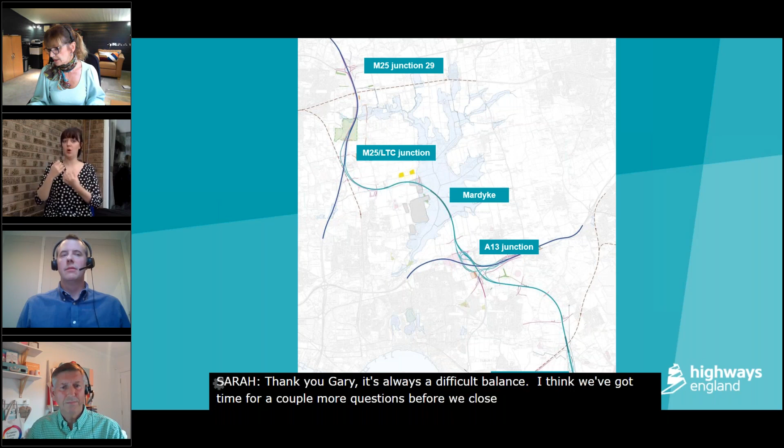Thank you, Gary. It is always a difficult balance. I think we've got time for a couple more questions before we close this evening. Steve, one for you. How near will the road be to Brandon Groves in South Ockendon?

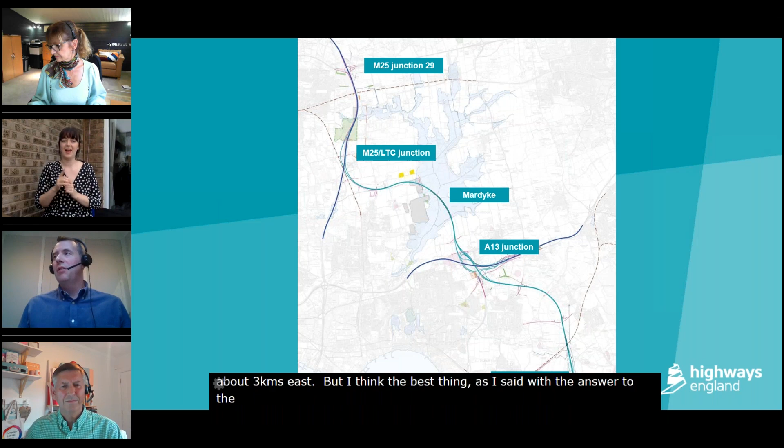Do you have the detail of that? Yes, I'll give two parts to the answer here, but I believe Lower Thames Crossing is about 1 kilometre north of Brandon Groves and about 3 kilometres east. But I think the best thing, as I said with the answer to the equestrian routes question, if the person asking that question visits our consultation website and goes to the interactive map, there's a very good search tool. You can put in your location, your postcode, and you can see where you are in relation to the route. There's also a measurement tool, so you can actually measure off exactly how close your property is, and that'll give you a more accurate answer. But I believe it's 1 kilometre north and 3 to the east, approximately.

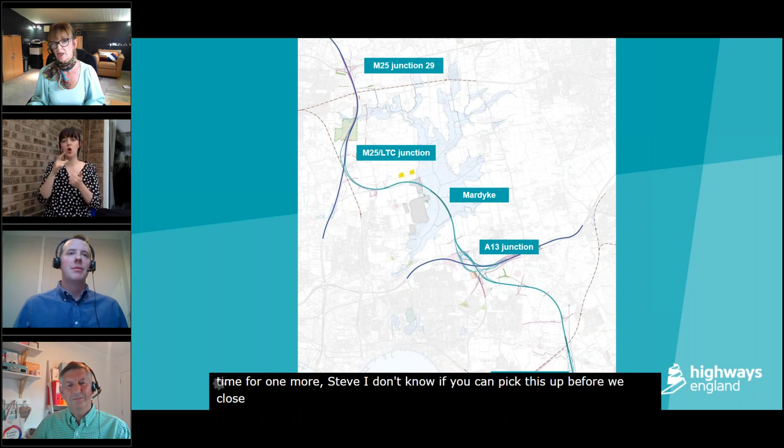Thank you for that, Steve. Well remembered. And I think we've got time for one more, Steve. I don't know if you can pick this up before we close. Why a footbridge and not a shared use bridge near the Thames Chase Community Forest?

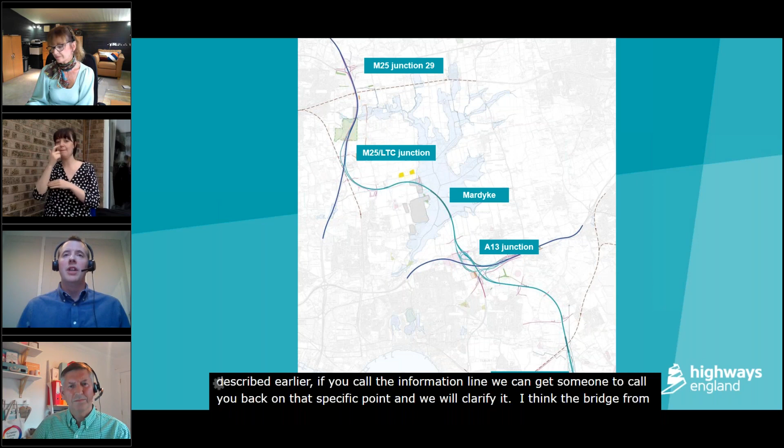Oh, that's a good question. I'd have to look into the details of that. If we've described it as a footbridge, that doesn't necessarily mean that it's not for wider use. Happy to take a specific question if the person asking would like to do a callback. As Sarah described earlier, if you call our information line, we can get somebody to call you back on that specific point and we'll clarify it. But I think the bridge from Thames Chase Forest over the M25 can be used by a wider range of users, i.e. walkers, cyclists and equestrian users, just because it's described as a footbridge. We usually use that term to mean non-motorized users, so it's not a road bridge. But happy to clarify that further if that answer is not sufficient.